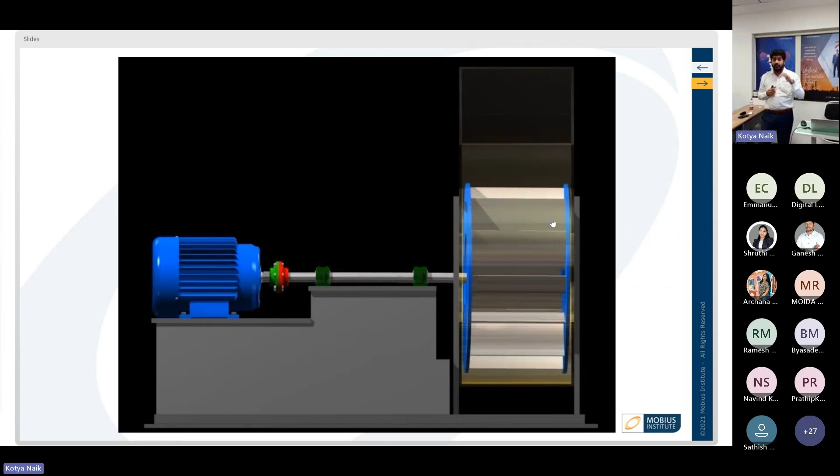Let's go through that - is this true, that we are killing the equipment? Yes, it says that we are killing the equipment, we are killing the assets. How? If you are not performing precision balancing before starting the equipment, what happens? The stresses due to unbalance increase on the bearings, and if the load increases even by just 10%, half of the life of the bearing is reduced.

So you can imagine how these can lead to failure, or how it can lead to reducing the life of the bearings or such rotating equipment assets. It also says that precision alignment, almost 50% of the equipment failures are due to misalignment. It can be a bearing failure, coupling failure, seal failure, or any other component failure. So those are 50% of the failures leading due to misalignment.

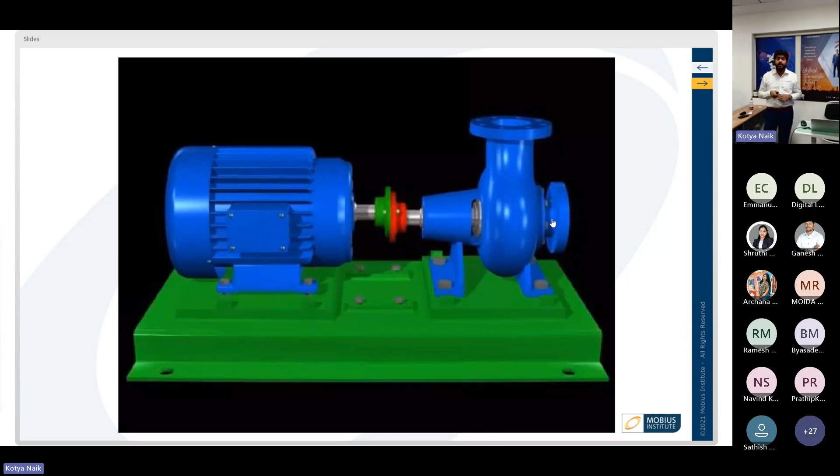So are we doing the right precision alignment before you start up the equipment? That's the question. It can be any reason, maybe a lack of tools, lack of knowledge, or lack of training. It can be anything. But the industry, when they did the surveys, almost says that 50% of the failures are due to the misalignment in the plant, and we are all aware of that.

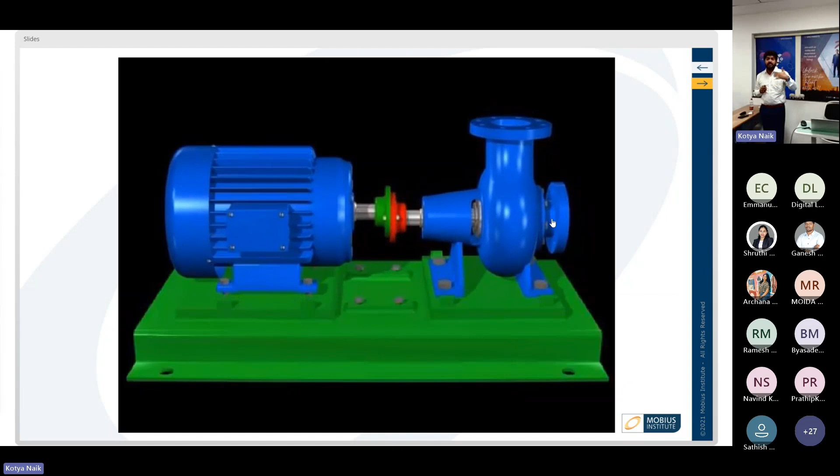If we do not align the machine correctly or precisely, that can lead to even higher energy consumption as well. It consumes almost 2 to 16% more electricity, and obviously that can push your industry to a big energy loss.

Okay, how do we often install these bearings? Are we just putting and then hammering, or are we using the right tool? If you are not using the right tools, maybe a hydraulic tool, hydraulic nut, or maybe any other bearing heaters? Are we measuring the proper fits and tolerances, and are we installing in the right way?

Are we storing these bearings in the right location? What precautions are you taking in storing those bearings, and during the installation, what precautions are you taking? So even a small cock in the inner race or outer race, small misalignment in the bearing, that can lead to reducing the life of the bearing. So these all lead to reducing the life of the bearing.

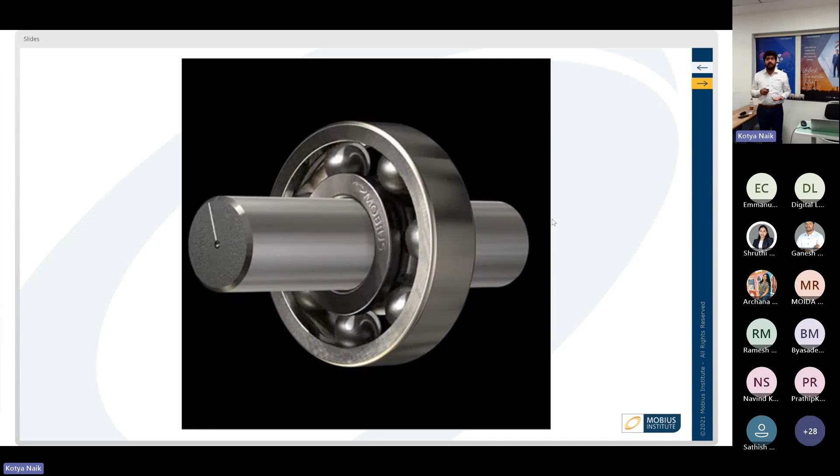Then how do we extend life? If you take care of them, starting from before you start up the equipment, first ensure the installation, how it has been done, how you have aligned or precision aligned, and how balancing has been done. Are you installing the bearing properly? Are you taking care of them properly? That helps us in extending the life of the equipment.

Another area that significantly reduces the life of the bearing or the equipment is lubrication. Lubrication contributes almost 45 percent, or close to 50 percent. Contamination in the lubrication could be a lack of lubrication, or not using the right lubricant. It can lead to almost another 50 percent of the failures. So we need to understand how even a small particle in the lubricant can lead to significant damage of those bearings.

You can imagine even a 1 micron size particle can accelerate wear in the bearings, or it can damage the bearings.

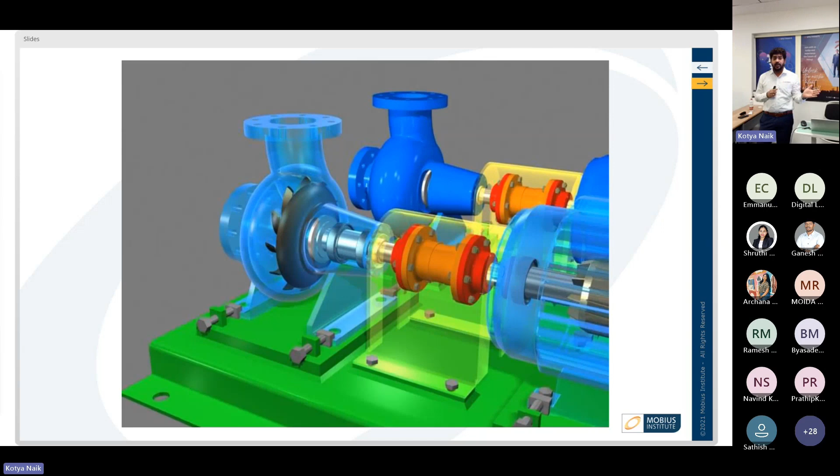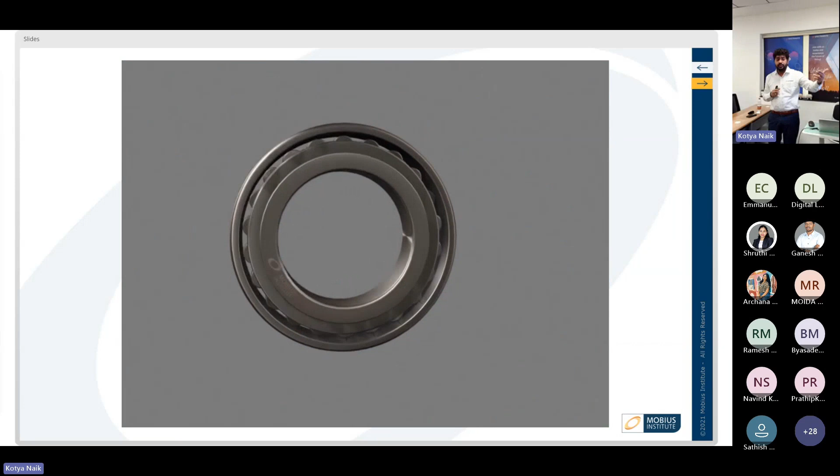Sometimes we have one equipment running and the other equipment on standby. We keep running only one equipment, and the other one we don't switch over from time to time, so we don't take care of the second one. During standby itself, a small amount of vibration transfers and creates micro pitting, which can lead to failure. That's called false brinelling.

This is one type of failure commonly observed in the industry where equipment has been kept on standby for a long time. We have also observed many times in paper machines where they normally keep the rolls in standby conditions. They install the bearings and keep them on the shop floor itself, in the machine floor itself.

So what happens is, when this high speed paper machine is operated or running, the machine floor level will have a small amount of vibration that can transfer to your rolls, and that can lead to a big failure when you replace the bearing or replace the roll during your shutdown or replacement activity. As soon as you start the roll, all of a sudden the bearing fails.

So that can be because of this kind of false brinelling issue. We have to store the equipment in such a way, and install it in such a way, in an isolated area where there should not be any vibration or any contamination. That's how you store this equipment so that you can avoid these kinds of failures.

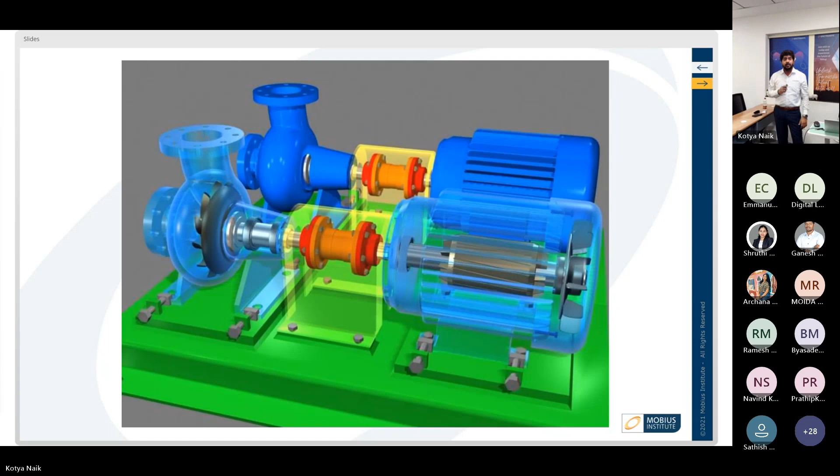That's about the common myth number one - what people believe, and how we can extend the life of the equipment, and also how we take proactive steps. So eliminating installation issues, contamination issues, and handling issues - all this we can eliminate by having good maintenance strategies, especially starting from installation onward. If you take care of them properly, the equipment is going to run for a very long time. Their equipment life can be extended.

Okay, so before we go to myth number two, I just want to understand your inputs. My colleague Shruti is launching the poll. You can give your opinions over there. I'll also put the poll here.

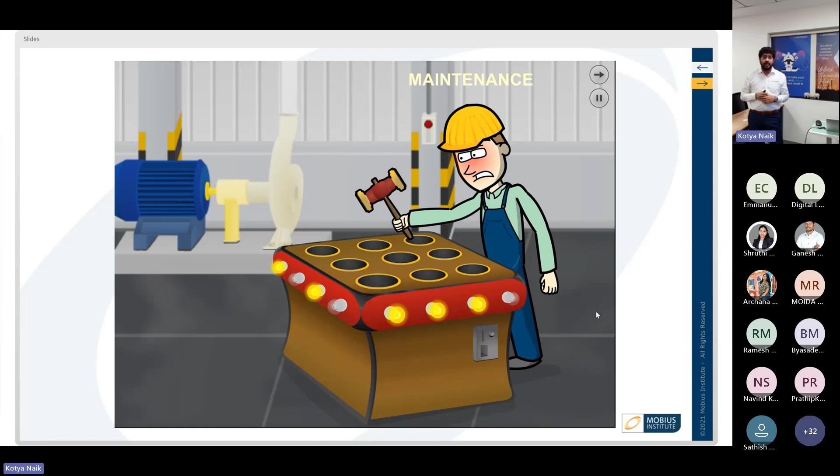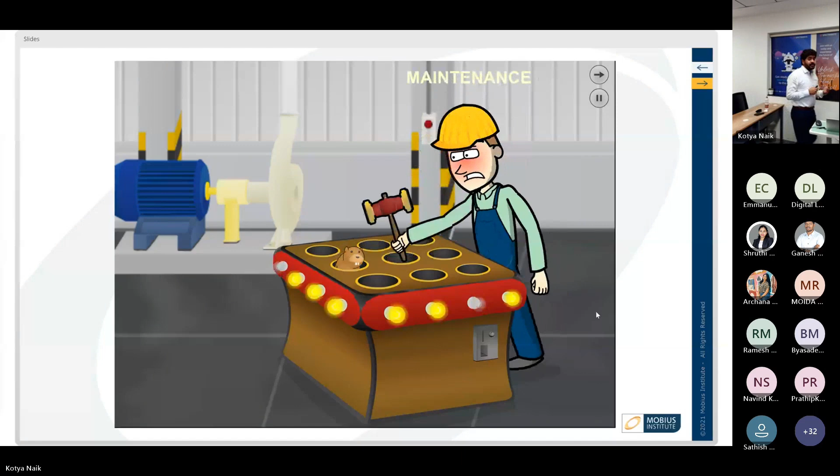Usually what maintenance people do is, whenever a problem arises, they fix it - when the problem occurs, they fix the problem. That's what the maintenance team does. Obviously they go through a lot of problems and failures in the industry, and they come across different issues and fix them one by one. And obviously they get tired of fixing all these things. If there is no contribution from the people, and no support from other departments, definitely they would be tired of fixing all these problems.

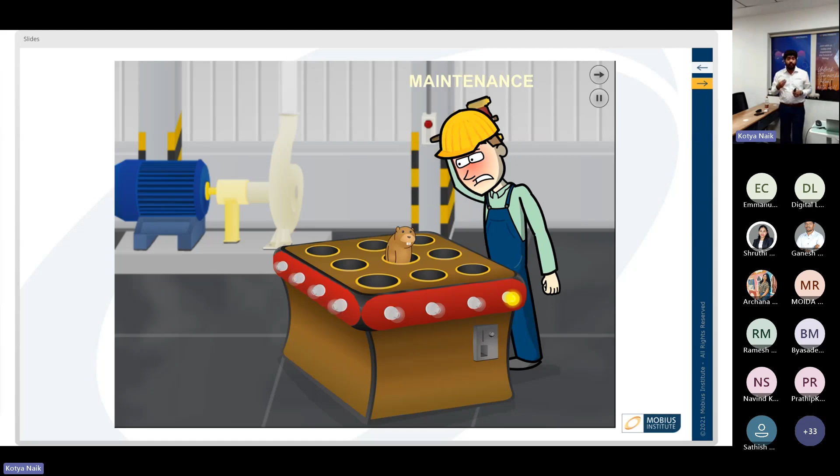So let's go back and understand why these problems are rising up, or why these problems often lead to failures, and what is the root cause of that. If you look at where these problems are coming from usually, and how they rise up as a problem, they lead to a breakdown, underperformance, or functional failures in the plant. So where are these coming from basically?

Whenever we see a failure, that can be because of some issues in the plant, say some breakdown which has happened, that may be because of some failure of the equipment. So what are those basically? What is it leading to, and from where? If you look at that, these are kind of breakdowns from where these are coming.

So it could be the kind of problem which is coming. There are some random problems, and there are some maintenance issues, like we will fix it and then we just avoid that. So we don't have time for doing the alignment now, let's look at that, maybe later we can do it. If someone thinks that, then definitely the later is going to lead to a failure.

And if someone thinks we don't have time because production is being required, then you start the equipment without doing much of the precision work.

Then it's going to be about procurement. For example, from where are we getting these spares, and when you need a bearing or a spare, when you assign this task to purchase, how does purchase get this material? What is the source of the material he's getting? Is it based on how the quality checks are being done, and whether we are just purchasing on the L1 basis or purchasing on the real quality? So what is the source of the purchase, and how others can contribute? All these can lead to failures.

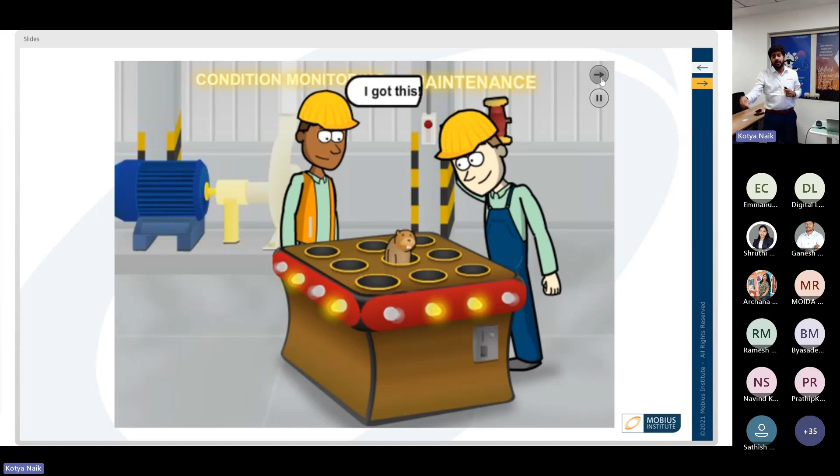If they perform their job well, and get to know what's coming up and which equipment needs attention, they can suggest to the maintenance team, hey, here is the problem popping up, can you handle this in the next opportunity, so that it will not lead to any failures in the future.

Similarly, they can help you in addressing the problem. With the support of condition monitoring, maintenance work becomes easier. With the support of design, procurement, maintenance, and operations, and the spares purchasing team that gets the equipment to you, definitely the best results can be achieved. That will help us avoid random failures and extend the life of the equipment.

All this is part of the defect elimination process. So when you do the work, do it right the first time. That's the philosophy we should inculcate, which will help us improve the reliability of the plant. That's everyone's responsibility, not just the reliability engineer's or the maintenance team's job to improve plant reliability. Everyone should contribute a bit. If reliability improves, it's a win-win situation for every stakeholder in the plant.

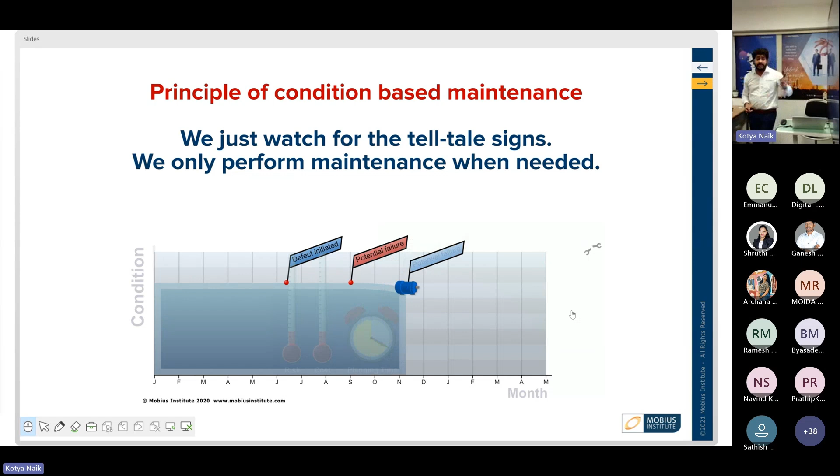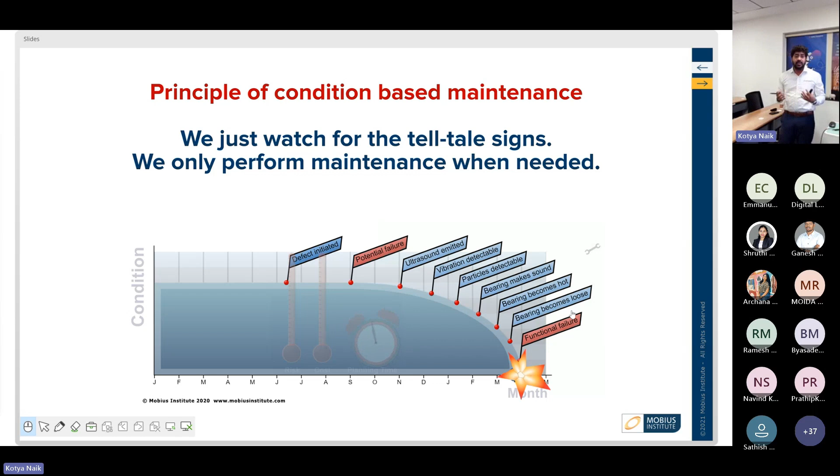This is the defect free zone, and then at some point the defect is initiated, and that leads to potential failure. Then it will come through different signs, like ultrasound and vibration, and particles will be detected, and the bearing makes more noise, and the bearing becomes more hot, and that can lead to the bearing becoming loose, and then can lead to functional failure, or asset failure, you can say.

So this way the problem has been initiated, and then potential failure has begun, and that has led to functional failure during the life of the equipment.

Even sometimes this PF curve can be this way - we are taking a general approach now. Sometimes this PF curve, from the potential failure begin or defect initiation, can be very short, or sometimes it can be very long, lasting for a longer time. It depends on the asset.

Now typically the graph, or the interval here, is this: potential failure to functional failure. We consider this mostly on equipment mounted with rolling element bearings. Here is the interval from defect, or potential failure initiation, to functional failure. So this is the interval you got.

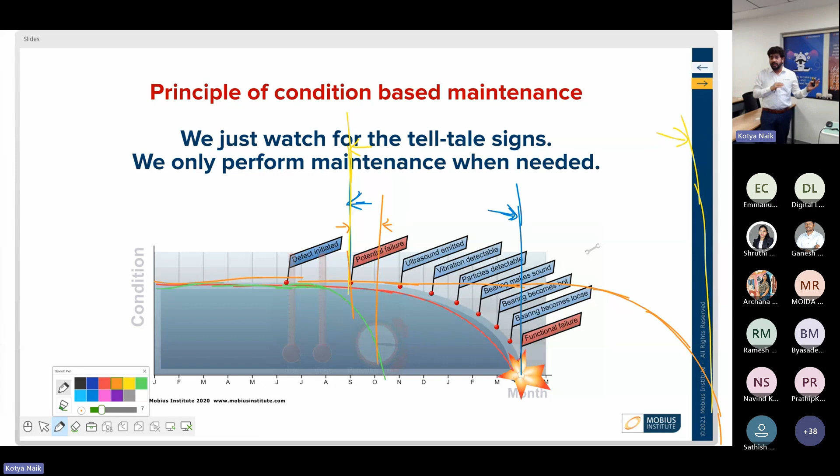Then you can adapt any of these technologies, starting from ultrasound, vibration, particle analysis, thermography, or temperature monitoring, or any other techniques which can help you detect the fault condition at an early stage, then you can take actions based on that.

So predictive maintenance is always a good choice for the industry. You can predict the condition, because before the asset fails, it will warn you what type of abnormality is being generated in the equipment.

So the PF interval is like this, and then you can see how early you want to detect it, and based on that you can deploy a technology where ultrasound, especially for rolling element bearings, will help you understand the very early condition, especially starting from its lubrication.

If the assets have journal bearings, the PF curve or PF interval may not be like this - it may be very short, because their failure is more imminent, faster.

So what you would say is if I use a technology which is not giving an early sign of that, then it can lead to failure. The failure would be more instantaneous here.

That's why for most such critical equipment, especially where you have a very short PF interval, we deploy continuous real-time monitoring, so that it helps you know instantaneously what is going on with the equipment. That's how you decide whether to do real-time continuous monitoring, interval-based monitoring, or off-route monitoring, like once a month or once a fortnight.

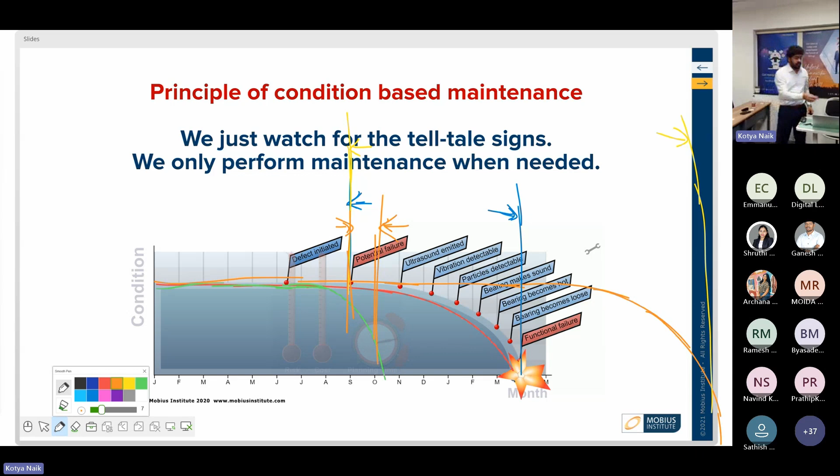Now if you look at preventive maintenance, the common myth says preventive maintenance is basically... yeah, I'll remove this.

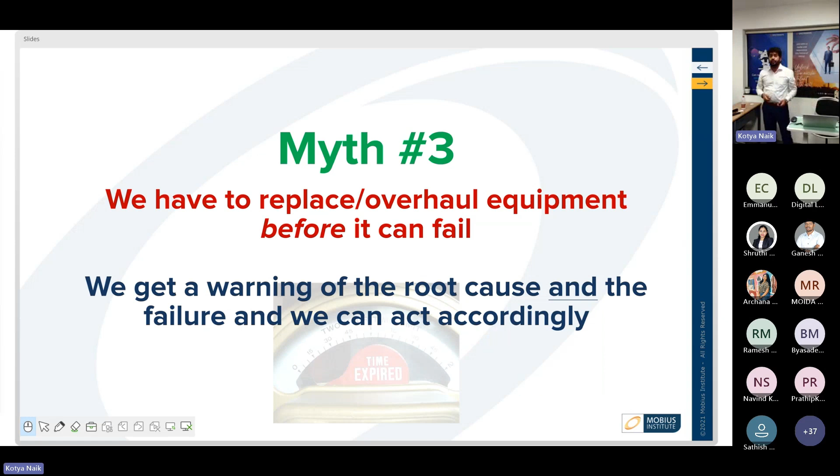So myth says that we have to replace or overhaul equipment before it can fail. In some equipment it works well, especially if you look at automotive, like our car tire example.

We say that every 3 years or every 40,000 kilometers we have to replace it. In that case it may work, but still after that period you can check the condition. It depends on where you drove the car, in a good road and good environment it can last more time. But if you drove in hilly areas with a lot of potholes, it may not even last 3 years.

So it depends on the equipment. The OEM has suggested 3 years or 40,000 kilometers because they have looked at historical data, and most cars in that zone or environment lead to this kind of failure. That's where they come up with those suggestions.

But it depends again on the equipment, how you operate it, and what is the environment where you have been operating. Based on that you can still check and see the condition, and plan your maintenance. That's why the condition based maintenance principle has come into place.

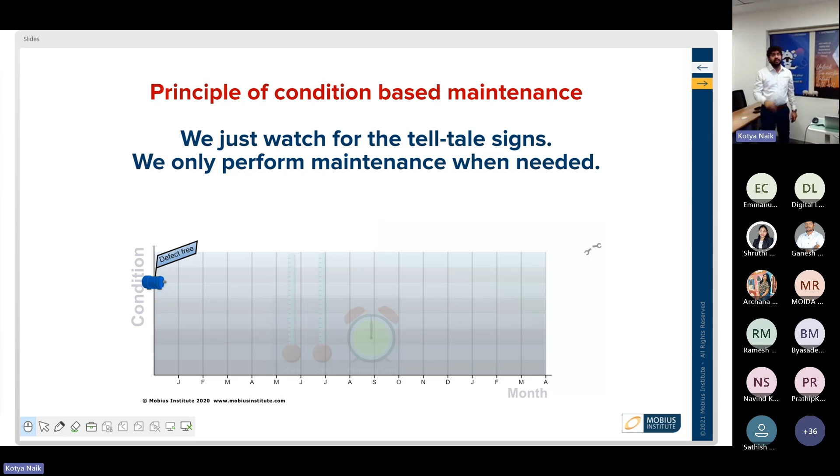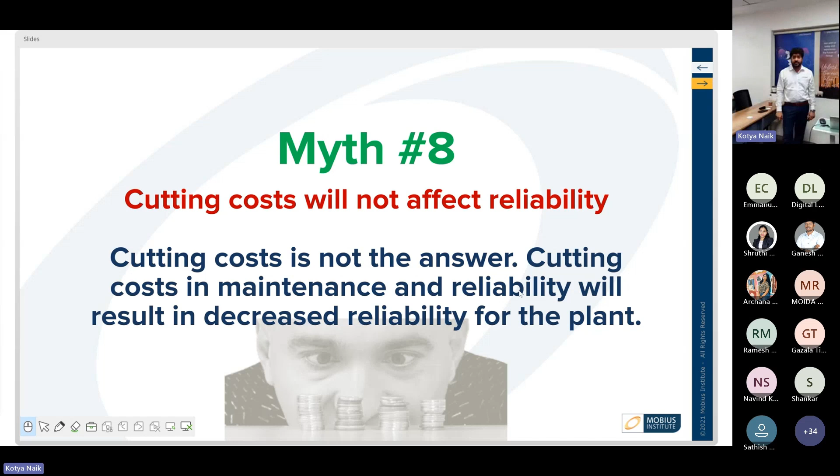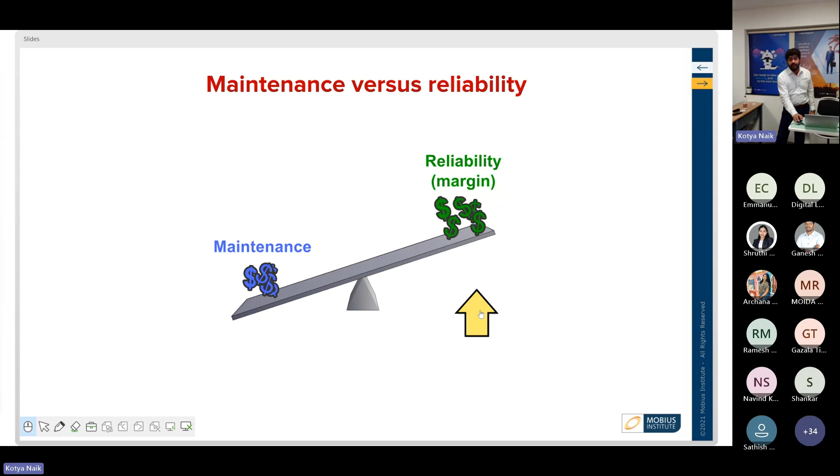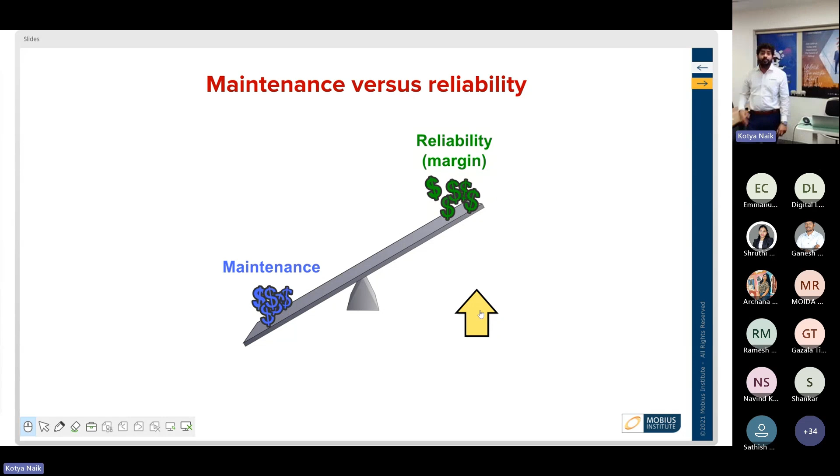If you keep reducing the maintenance cost further and further, one day it minimizes your reliability initiatives, and one day it can lead to complete breakage of the program itself. That should not be the case. Reducing maintenance personnel cost is not always the good choice. You should focus on improving reliability, and when you improve reliability, the maintenance cost will also be taken care of. That contribution really helps improve the profitability of the plant.

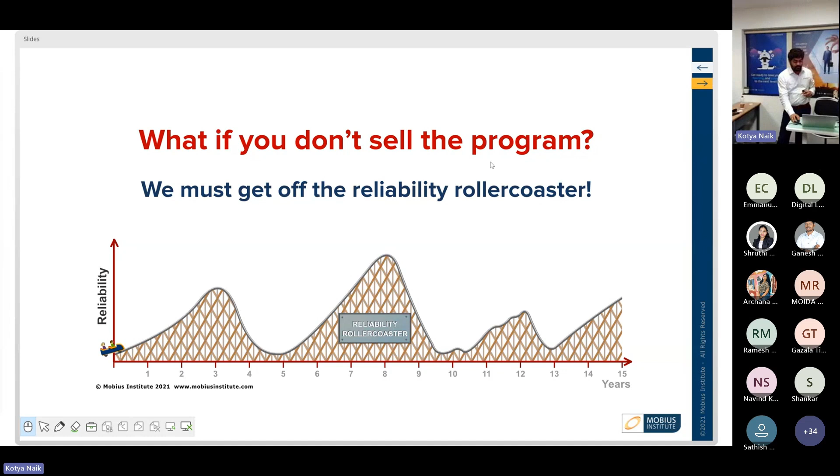So what if you don't sell the program? Again, it's kind of a roller coaster. You must get off the reliability roller coaster. If improvements have been made and you've achieved peak performance, but you're not presenting them, people will think this is an area where they can remove people and save cost because they aren't adding value. Then your reliability program goes down.

Then a new manager comes and sees a lot of failures or breakages, with no improvements being made. He sees this as an initiative or improvement area where he can step in, show his value, and get promoted. Then they start looking into it, and it goes up again - and then it's the same thing all over.

It may cut down the cost and all, so you should get out of this kind of cycle. It means you should constantly communicate the value addition you are making, so people are aware that this is a living program, not a one-time project. It is a living program - reliability is a living program - and that message should reach everyone.